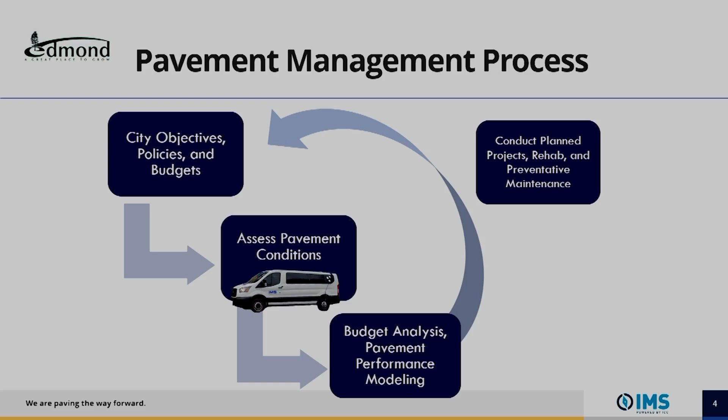And I'd like to also talk about how we go about assessing these pavements that we're driving. So I'm not sure if anyone's familiar, but there's something called the Pavement Condition Index. And this is a number scaling from 0 to 100 that quantifies the conditions, because anybody can go out and say, oh, this is a good road, this is a bad road. This is a way that we put a number to those descriptions. It makes sense, 100 being excellent, 0 being very poor, but these are just ways to understand this data. So very poor and poor, that 0 to 40 range, is very important to understand.

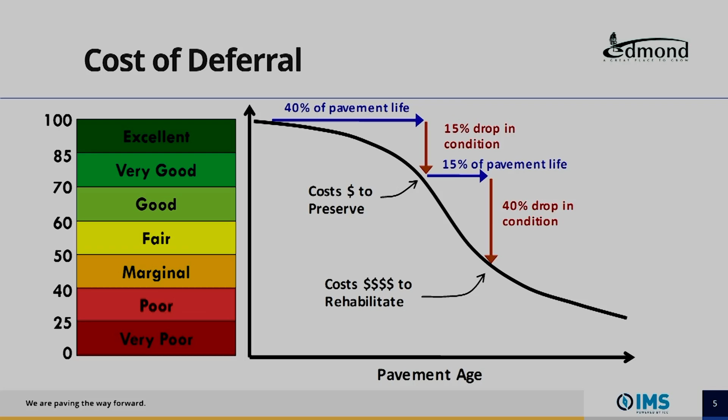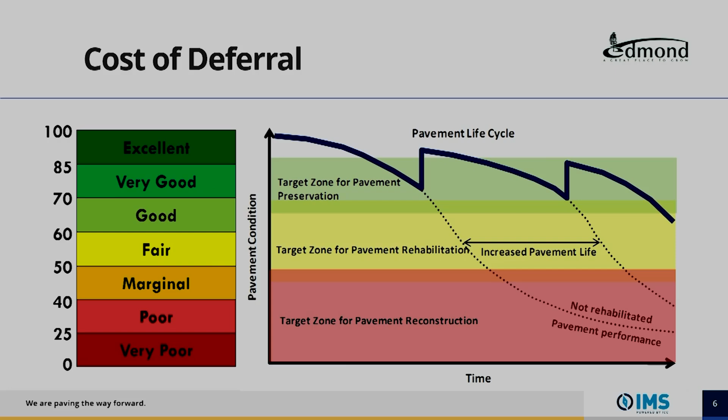So that is one of the driving factors. And you can see here, we have some color-coded bands, essentially just targeting where you have what we call a preservation zone. And it's best to try to treat pavements in that area because it bumps up the service life and basically extends the life of the pavements for as long as possible. And if you were to treat it in the target zone in the red there, you're spending a lot of money. So just hammering home that point here.

Ma'am. So now I'll talk, oh, go ahead. Oh yeah, here we go. I turned it so you didn't hear all my stuff.

Any suggestions you could give us on the life of a pavement age? Because it says pavement age a couple slides back, but can you give us any idea about what that really means? Yeah, so it depends on the type of pavement, whether it's an asphalt pavement or a concrete pavement. Asphalt pavements typically last anywhere from 20 to 30 years. Concrete pavements can last up to 50, but concrete pavements fail much more severely. They fail, and you've got to basically just rip them up sometimes. Does that answer your question about service life? Yes, that's great, thank you very much.

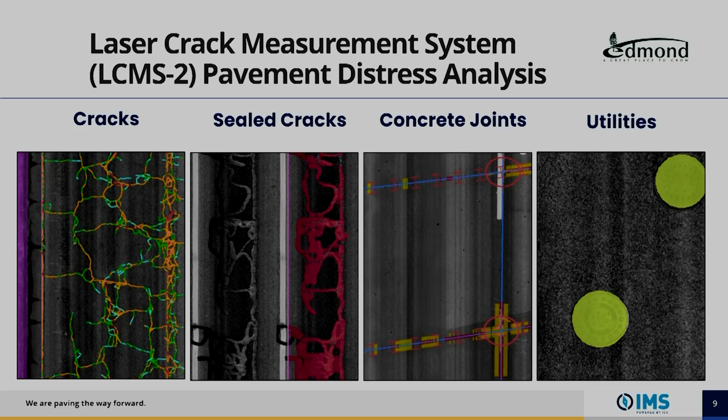Another thing that was done for this project was structural testing. This is highly recommended by my company because it is a way to determine the structural health of the pavements. On this earlier slide, you can see it's everything on the surface of the pavement. But what we're doing here with structural testing is actually determining the strength of the base of the pavements that we're assessing. I won't get into the details, but essentially it allows us to determine that structural health. So good, fair, poor, things like that.

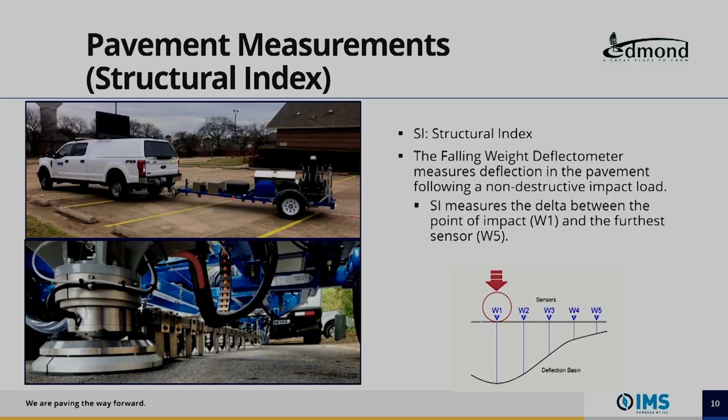And we've also got here how we actually use this data. All of the data we've collected on the surface and the structural health gets quantified into that pavement condition index. And we do this according to the standard ASTM D6433. So this is not just a number that we made up.

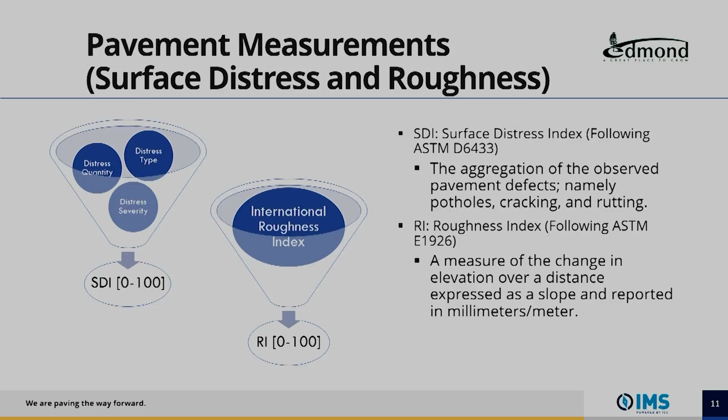And highlighting here once again the pavement condition index, you can see the scale here. But another thing I'll point out: pavements that are a PCI of 40 or below, we tend to define as our backlog, if you will, just the pavements that are poor or very poor. Because like I mentioned earlier, they're typically more expensive to fix. So it's something that we like to highlight when we collect this data.

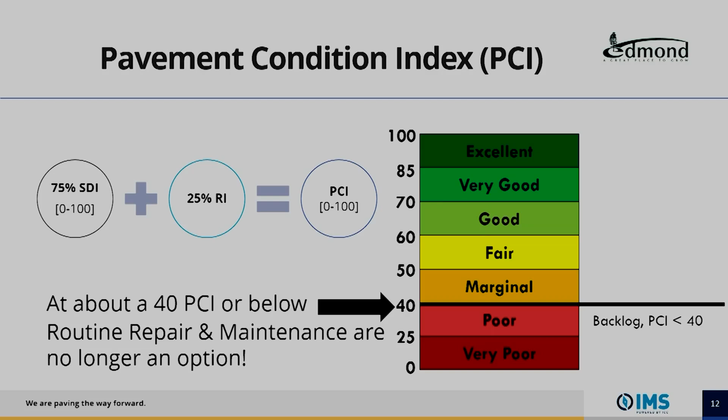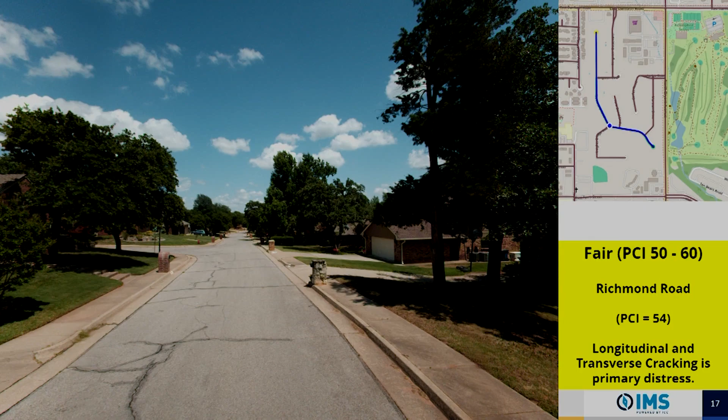And then we get to the excellent roadways, which are usually the very brand new roadways where they have very little cracking, if anything. You'll notice it's a PCI of 97. This could just be due to some surface defects from construction, which are very common.

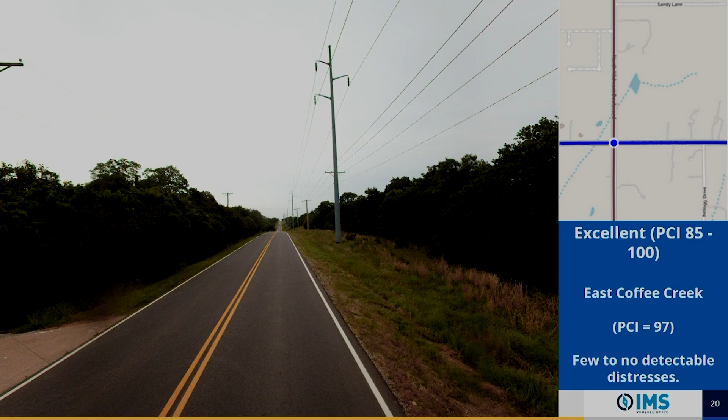There we go. Okay. Don't let anybody drive on that.

Yeah. So now that you've seen what some of the pavement conditions look like, now we'll talk about on a grander scale what this looks like for your network. So here is the distribution for all of the pavement conditions that we collected and processed for Edmond. You'll notice that on average the value is a 65. The backlog is 12%. And at this point, I'll further contextualize that 65 is something we see on the national scale; this is a pretty average number.

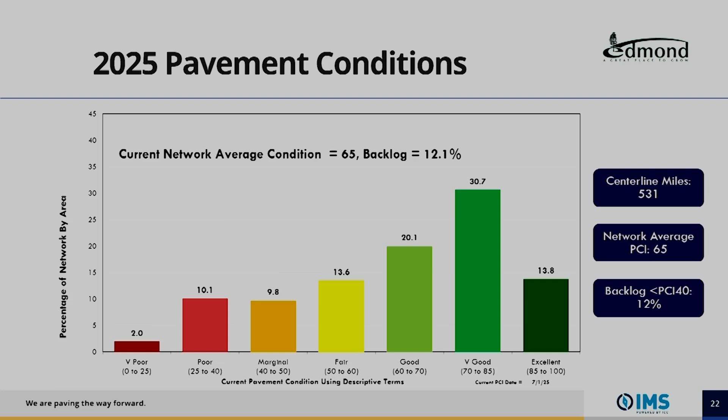There's not a standard that says, oh, this is the number that you should strive for. This is the number that most agencies see. It's just something my company sees because we do a lot of this type of work. But 65 is something that we would consider very average. 12% being the backlog, exactly the same thing. Very average. I'd say we'd definitely try to reduce that number over the next few years, but it's definitely on par, I would say, with the rest of the nation.

And sometimes it's helpful to view this from a functional class standpoint. Functional classes are basically the hierarchy of your roadways. It tells you what are most important. Obviously, major arterials carry the most volume of traffic, so we want to make sure that those are in good condition. Those being an average of 78, that's a great thing, that the most important roadways are in good shape.

Sometimes people look at the locals and residentials and say, oh, well, those are low. Why aren't we prioritizing those? The answer is simply they don't have as much importance, but obviously we still want to make sure they get some love here and there. So that is built into the plan too.

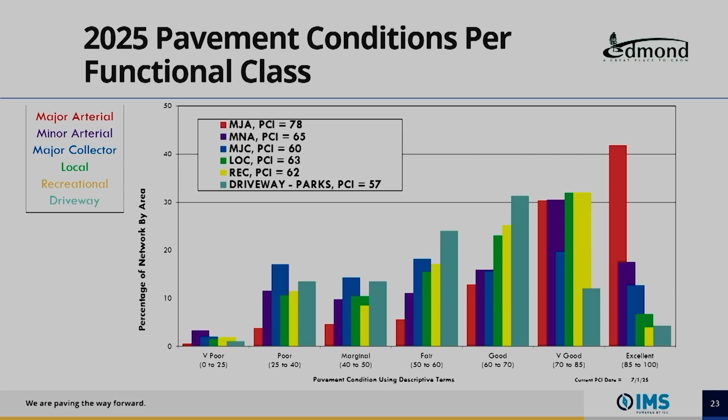But sometimes looking at it this way tells us maybe we need to focus on this functional class, maybe this one. But the fact that they're pretty well distributed is a good thing. There's not somewhere that stands out as being a need to focus on per se. And just to further highlight the breakdown of how many of these types of roads you have, it's very common that locals and residentials make up the most of your network. They have much more volume of area, of the pavement surface to really maintain.

And then the other way to view this is by the pavement type. This just shows that they're pretty even. I would not say that you need to prioritize one over the other. Just the concrete and asphalt, they make up pretty much the same distributions here.

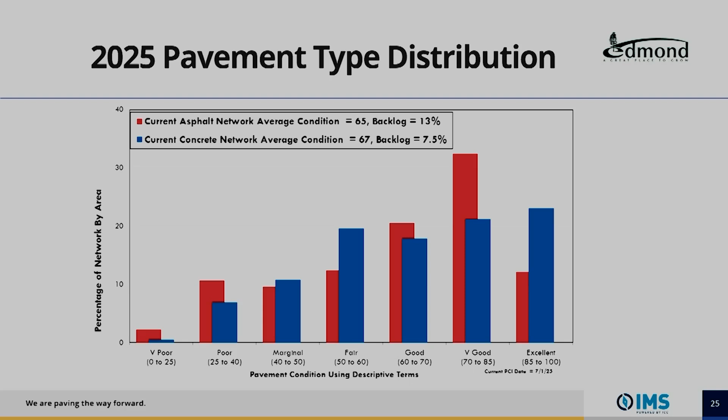In 50 years, they may have a problem if they don't maintain it as well as they should. And I'm willing to bet, and I've not looked into detail at each one of these, but a lot of them are probably newer development areas that are very new concrete. They will have problems, not in the near future, but years out, trying to keep up with all that new development. But just wanted to put this in front of you and get you to understand how you fare compared to your neighbors.

How often are you measuring them? So it really depends. There's not a standard that says you need to reassess this so often, but we tend to recommend, as the people that do it, of course, 3 to 5 years. Okay. Yeah, we're looking at doing every 5 years. We're moving to an annual collection of 1/5 of the streets so that the oldest data would only be 5 years old. Okay.

Keep on. Okay. And another thing that we delivered is something we call Inform. This is one of our proprietary web viewing applications. This is something that Edmond has access to now and has been using for the past 2 weeks or so. So just dipping their toes into this, but I've heard good things. It's a helpful tool to visualize some of the data we delivered, the imagery. We've provided all of the imagery, including the laser crack measurement system imagery.

And it's all viewable in this web application. You're able to scroll around, look through everything, and anybody with an Oklahoma or an Edmond email address with the city is able to access and sign up and see all of this. So it's just something that we provided, and I think you guys are getting or will be getting good use out of this.

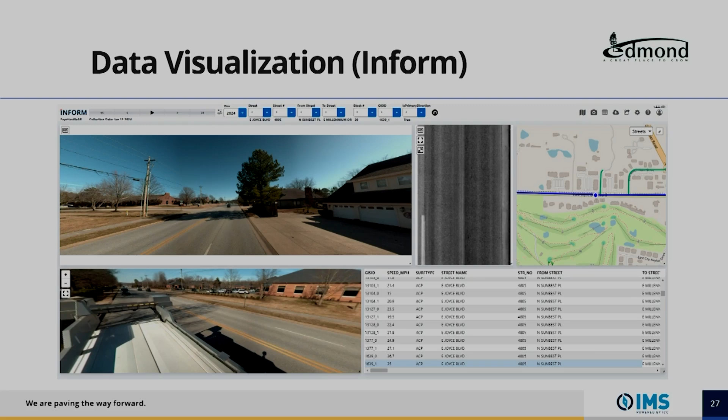Is there a way to export like a heat map or something of the city so we can kind of see where the hotspots are? Yeah. We've definitely got some citywide maps that are color coded, so you can see where the very poor areas are, where the good areas are, and all that. So yeah, we can definitely provide that. Okay, thanks.

And now I'll get into some of the analysis and project planning. So everything we've talked about so far has been what we call current conditions, so conditions at the time of survey. This is very helpful data. It helps you kind of know, okay, where do we think we want to do some work? Where do we want to focus on? But this is the actual planning and the generation of the plan using optimized parameters, things like that.

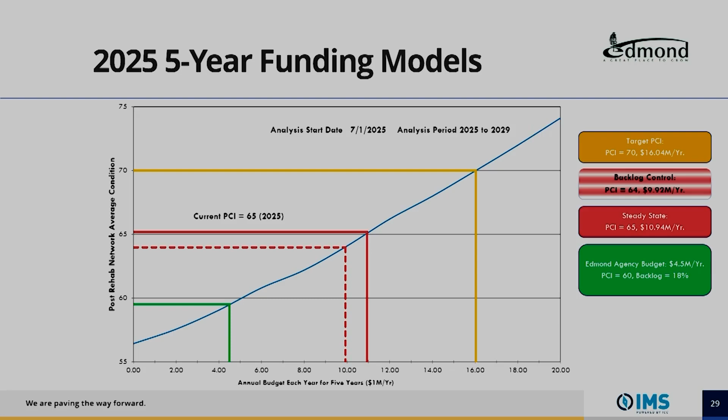I have a question. Say it would take 16 million per year for 5 years to do it. Then what does it take to maintain that 70 after that? Is it still 16 million every year? It likely would not be. We would have to do the analysis to be able to tell you for certain what it would cost. But I can tell you it would be much cheaper to maintain that condition after the 5 years than it would be to get there in 5 years. Does that make sense? Mm-hmm.

This doesn't account for new roads either, obviously. Can you repeat that? Sorry. New roads aren't accounted for here. Correct, yeah. This is only the inventory, things that we knew about at the time of the analysis. But definitely, in this, we have programmed any planned work that you guys have. So let's say that you have planned work in year 2027. We have incorporated that, and it's reflected in the plan as well.

Can't afford to drive it.

Does it assume the same mix of asphalt and concrete?

So it assumes whatever pavement type is currently there, yes. And then does it prioritize major arterials, so we can go, hey, like for a PCI target for neighborhoods, probably being 60, but major arterials, we want it to be 70? Or have we thought of it in that way? So in the plan, it's automatically the hierarchy that you saw earlier, the ordering. They're assigned priorities based on that. So yes, arterials are given higher priority. And we can toggle that internally too.

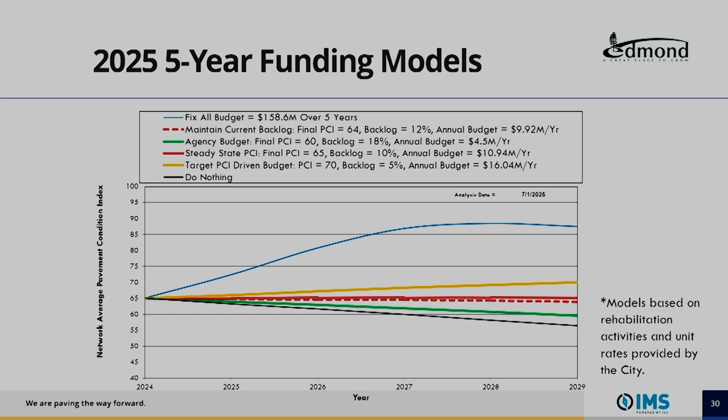You'll notice that the do nothing line at the end of the 5 years is closer to our green current budget line than the maintain current backlog line. Yeah, that's always a fun one. People start throwing things at me then, so I try not to say that. But it's very common to see that it tends to be very close to the do nothing. That's something we see a lot. The truth is that it is close to doing nothing, and that's a large pill to swallow, considering we're talking about $5 million. So keep the same condition after 5 years or improve it; that's a good rule of thumb. It just takes at least $10 million per year to do so. So with that, please don't throw things at me.

But that kind of summarizes everything we did for this project. I'm happy to take more questions. But yeah, thank you. Thank you.

I have a few more, but I'll wait for everybody else. Go ahead. Would this increase be on top of all of the other projects that we look at fairly regularly, where we go, okay, we need to spend 165 million and we might bring in 40? Do you know the charts I'm thinking of? The graph chart that we used before. Yeah, I have to go back and look at that. Okay, I didn't know how this, like, adding $10 million a year would fit into that.

I have to go back and look at that. I can't remember how we arrived at that number exactly. Okay, no worries. I think it would be on top of that, though. Yeah. I don't think we assumed. Probably so. Yeah, I'd have to look at that. Okay, yeah, thank you very much. Other questions?

I assume it's like a parametric model that you're using to determine the construction costs? Can you talk more about the inputs for that? So generally speaking, we ask that our clients provide us with unit rates, or sometimes construction bid tabs, so we can calculate what unit rates will be in your area. We have some default ones, but we don't love to use those because they vary so much by location. And we were able to get a lot of information from recent bids for overlay projects and concrete reconstruction work. Okay, thank you. Other questions?